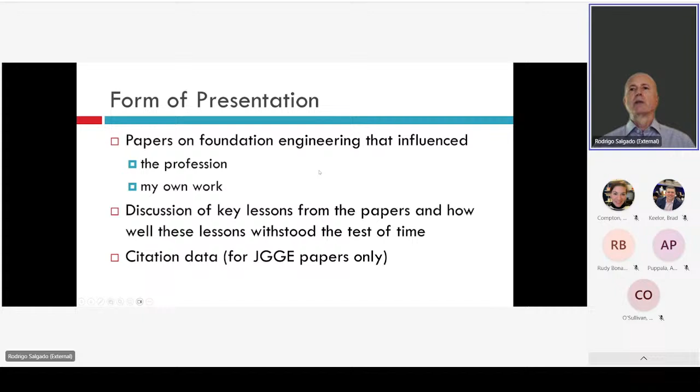I'll talk a little bit about citation data, at least I'll have the numbers on the slides for the JGGE papers only. In selecting the papers to include here, I considered a narrow definition of foundation engineering. Basically, the focus is on papers that explicitly dealt with foundation elements, piles, footings, etc., in which some significant vertical load was present. So no papers on slopes, retaining structures, seismicity, and so on are included.

So we'll start with shallow foundations, with this paper—actually a discussion by Meyerhof of a paper by Jumikis, published in 1956. This was a discussion based on experimental work that Meyerhof had been doing, and it's apparently the first time that we get into bearing capacity equation factors for load eccentricity and inclination. The other interesting piece of this discussion was Meyerhof's observation that in his experiments, the shape of the slip surfaces looked like a log spiral.

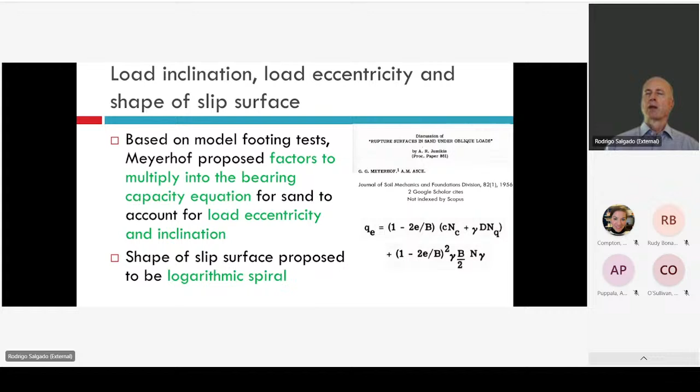So how has that withstood the test of time, as we said we would talk about? What have we learned about those two things since? We know, for example, that there is fundamental error in the bearing capacity equation for sand. An important part of that is that sand does not follow an associated flow rule, which was a key assumption in the derivation of the bearing capacity equation originally. This leads to an over-prediction of the bearing capacity of footings in sand if you use the original unmodified version of the equation. Eccentricity is still accounted for in the same manner if you're working with the bearing capacity equation, but there are alternative approaches like VHM diagrams.

Imaging plus digital image correlation analysis of these images do show that the surfaces resemble a log spiral, but they are not really a log spiral, because you don't have a constant friction angle along the entire shear band or line.

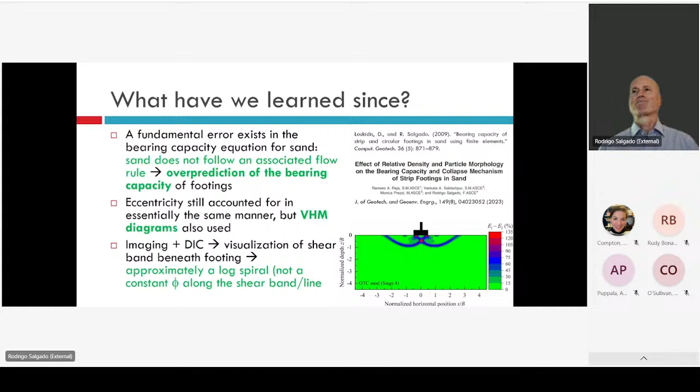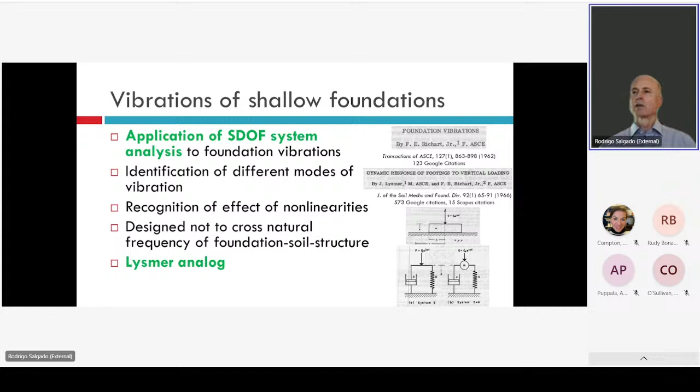Two important contributions that appeared in the journal were from Richart and Lysmer, dealing with foundation vibrations. The idea here was basically the application of analysis for single degree of freedom systems to foundation vibrations. In the papers there was discussion of different modes of vibration—three rotations and three translation modes—and recognition of the effect of nonlinearities on the response of the foundations. There was also discussion of design, such as a possible strategy of not crossing the natural frequency of the systems during design. An important result of this work was the proposal of what is today known as the Lysmer analog, which essentially converts energy loss due to wave propagation to a representation using a dashpot and viscosity.

Moving on to deep foundations, starting with axial resistance. This paper by Meyerhof in 1956 followed a trend at that time of trying to approach the calculation of the base capacity of piles using something resembling the bearing capacity equation. This particular proposal by Meyerhof, of course, was not correct—you can see that the mechanism proposed for failure of the pile was kinematically inadmissible. Today we're largely beyond using this type of approach for pile axial resistance calculation.

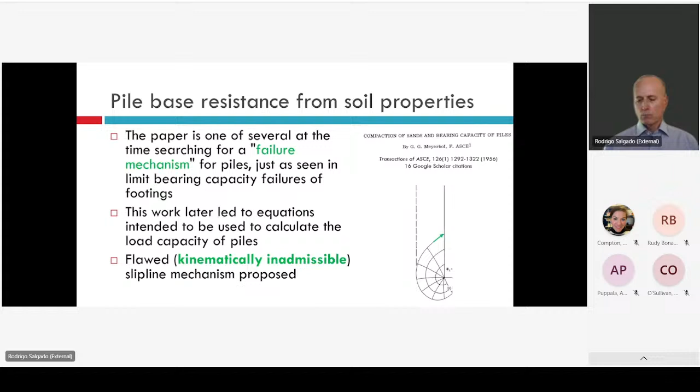We have also learned that it's much more effective to try to do pile base resistance calculations using something like the CPT. So you're basically analogizing the limit bearing capacity of a pile to the cone resistance, and then expressing pile unit base resistance at different levels of settlement as some fraction of qc.

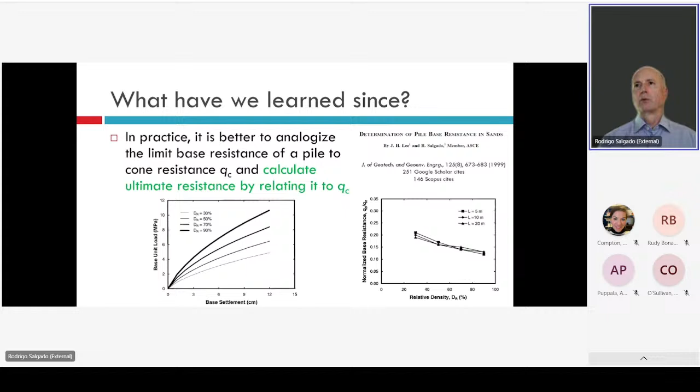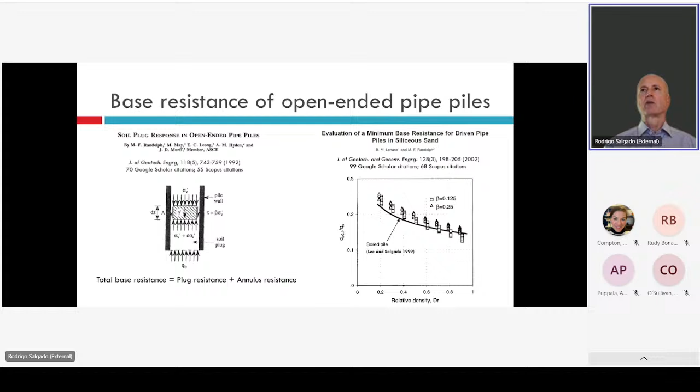The journal also published important papers dealing with open-ended piles. This paper by Randolph et al., published in 1992, attempted perhaps the first analysis of the mechanics of plug formation in an open-ended pile. That work continued at the University of Western Australia, and Lehane and Randolph published another paper in which they concluded that the unit base resistance of open-ended piles, and in particular the soil plug, could be analogized to that of a bored or non-displacement pile, or at least calculated using the unit base resistance of bored piles as a reference.

So what have we learned since? We have learned that plug formation is a function of a number of variables. Relative density is an important one. The presence of layering, whether the pile is going from loose or soft soil into dense or stiff soil, or the opposite, makes a significant difference in whether you form a plug or not. Also important are the effective stress state, the diameter of the pile — it's of course easier to plug with a smaller diameter — and wall thickness.

Something else that has been learned is that even if you have a fully coring installation, that plug is still active. So it becomes a matter of calculating what the contribution of the plug is to base resistance.

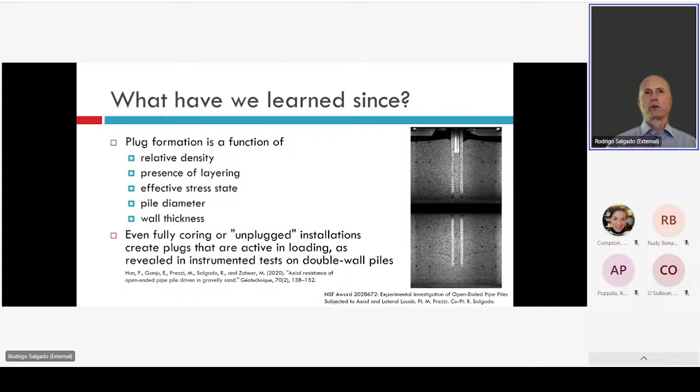Another important paper published in the journal had to do with the difference in shaft capacity of the pile between tension and compression. This is a paper by De Nicola and Randolph, published in 1993. The paper brought attention to the difference that can exist between tensile and compressive shaft capacity. The authors at the time hypothesized that this would be due to Poisson's effect. I think today we know that not to be the case.

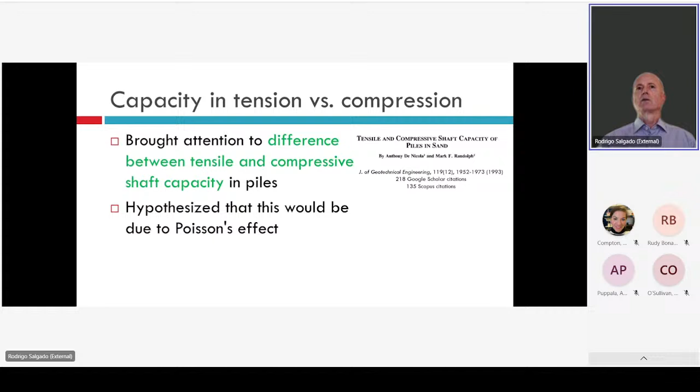Lehane, Jardine, Bond, and Frank published in the journal this very important contribution. They used a model pile that allowed them to track the shaft resistance as the pile was driven down into the ground. What was seen is that the shaft resistance tended to degrade the most for locations up the pile, further away from the pile tip.

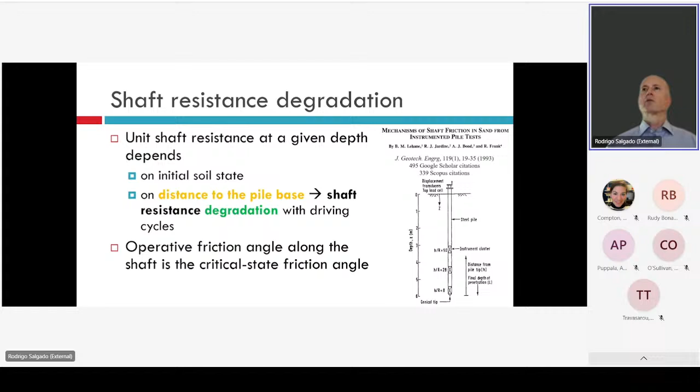Another very impactful contribution was published in the journal in 1988. This paper by Harry Poulos proposed the use of cyclic stability diagrams for axially loaded pile design. This is still used a lot in the offshore industry. The idea is that depending on the number of load cycles and the amplitude of the load cycles, you may see a significant degradation of axial capacity and possibly even a loss of stability, or you may not see that at all. It all depends on the combination between load amplitude and number of vibrations. So these diagrams are still part of design to this day.

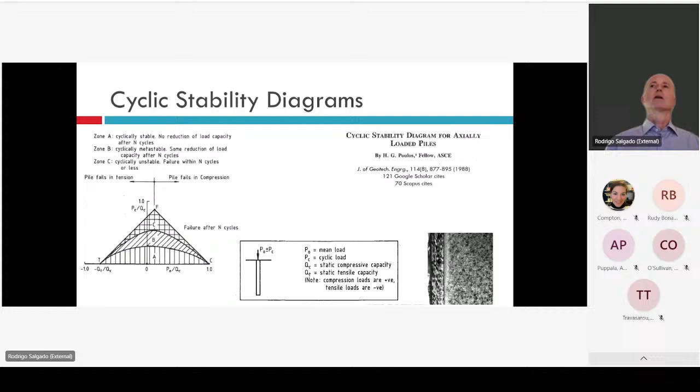Moving on to pile driving.

Perhaps the most impactful paper in this area is the paper by E.A.L. Smith, proposing what we know today as the wave equation analysis to simulate the driving of piles in the ground. You start with known or assumed static resistance along the shaft of the pile and at the base, and using information about energy loss along the pile shaft, so damping, you simulate the driving of the pile. Basically, you try to simulate how much a pile will advance for a given hammer blow if you know the static resistance of the pile and the damping characteristics of the soil.

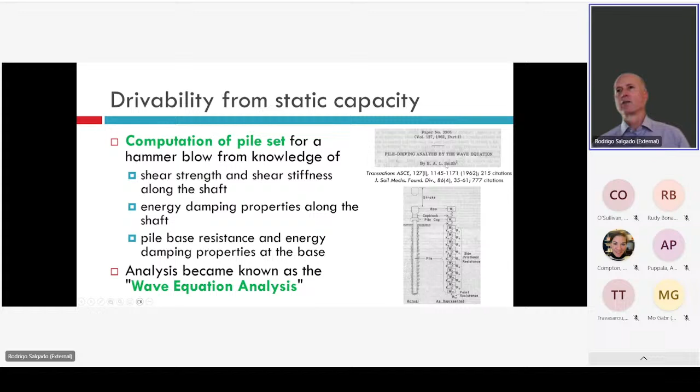An interesting fact about this paper is that if you look at the initials of the author, E.A.L., they are key variables in this analysis. E is Young's modulus, A is the pile cross-sectional area, L is the pile length, and you could argue that the S in Smith stands for settlement, perhaps.

Kind of the reverse logic of that paper, instead of going from static resistance to driving resistance, you try to go from driving resistance to static resistance. That's what this contribution by Rausche, Goble, and Likins is all about. It became the basis for methods of quality assurance and quality control that we use in geotechnical engineering today to a large extent, which are dynamic load tests. The idea is that you measure force and velocity during a hammer blow, and you try to figure out what that tells you about the static resistance of the pile.

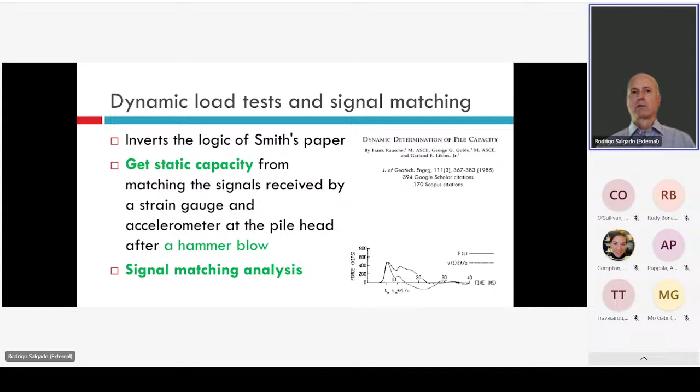The methods that allow you to do this are known as signal matching methods. What we have learned since is that the relatively simple models used originally by Rausche et al. can lead to under-prediction of pile capacity. So if you use more realistic models for the soil and for the pile-soil interaction, you can get more accurate estimations of pile capacity. But the method in its core, as originally proposed, stands to this day.

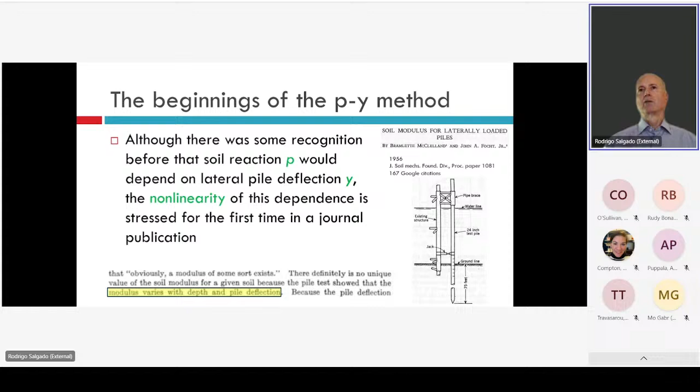Moving on to lateral loading, it appears that the first time that something we would now recognize as the PY method was proposed was in the paper by McClelland and Focht in 1956. The key recognition by the authors was that the normal stress between the pile and the soil would depend on the lateral deflection Y in a nonlinear manner. This, of course, would lead to so-called PY curves, in which you don't have a linear relationship between P and Y, but a nonlinear one.

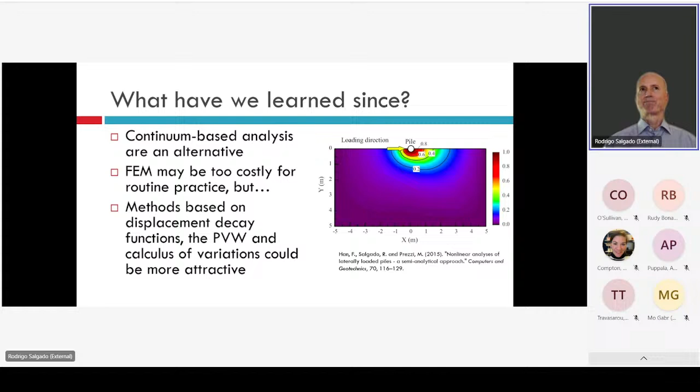What we have learned since is that there is an alternative route, not often used in practice, but which probably leads to more accurate results, which is to do analysis based on the soil modeled as a continuum. You can, of course, use FEM, but there are alternatives to FEM that produce faster results and are just as accurate.

I believe the final paper I have included in this presentation is by Stewart and co-authors, recently published in the journal. It deals with the case history of the settlement and tilt of the Millennium Tower in San Francisco. The authors go into great detail on aspects of what happened, including drainage issues. However, I think an important lesson from this case history that I hope the journal revisits with more publications is the risk of placing deep foundations on intermediate layers. If you do that, you need robust analysis to go with it to make sure that layer will be able to carry the load you're placing on it.

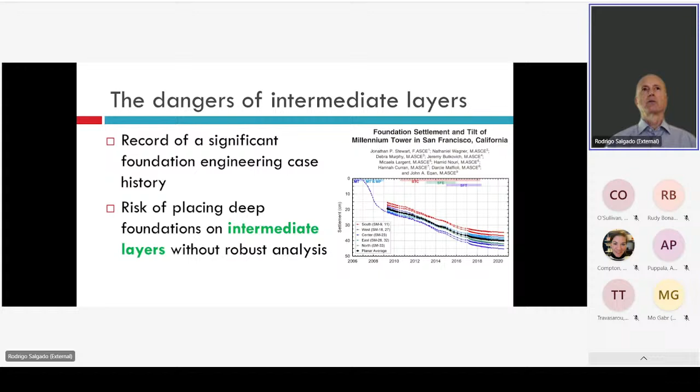This is not a new problem. If you go around the world, you will find similar cases. For example, in the city of Santos in Brazil, you also have buildings placed on deep foundations in intermediate layers that have settled and tilted. So it's definitely one of those areas that the journal tends to publish a lot, case histories that offer the community an opportunity to reflect on these challenges.

I think I have shared with you a number of papers that illustrate the importance of the JGGE in advancing the knowledge of foundation engineering over the years. There have been seminal contributions to the journal in terms of shallow foundation bearing capacity, foundation vibrations, the axial capacity of piles, non-displacement, displacement, and open-ended pipe piles.

The key papers that laid out the dynamic load test method of foundation verification and wave equation analysis for foundation design and planning were published in the journal. The PY method, which is widely used in practice, the original paper was also published in the journal.

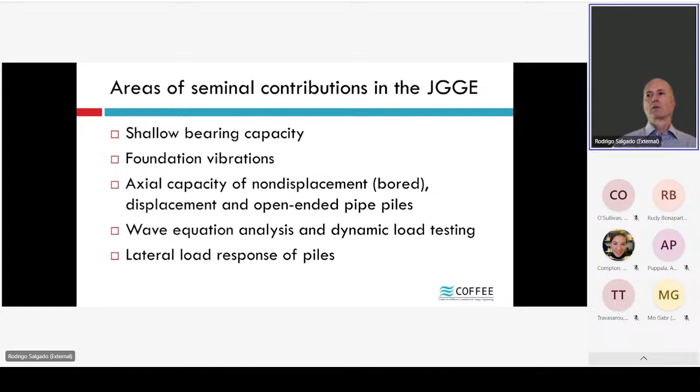I think these papers illustrate the importance of the journal to the community. Thank you very much again for the initiative of organizing this, and I'll pass this on to Rudy now.

Thank you, Rod. I'll just get myself organized here. My topic today is geoenvironmental engineering contributions to the ASCE JGGE.

To prepare for today, I conducted a survey of the journal to identify geoenvironmental papers. I estimate that as of this time, there have been about 240 such papers in the journal.

The first paper was authored in 1965 by Jim Mitchell and his students on the topic of the permeability of compacted clays. In the 1970s, I identified two papers related to geoenvironmental engineering, one on MSW landfill rates and another on methane migration around MSW landfills.

Moving on to the 1980s, there were about 10 papers on a broader range of topics. Then in the 1990s, about 25 papers on an even broader range of topics. You can see the trend here. In the 2000s, 60 papers; 2010s, 90 papers. And we're tracking for the 2020s at about 100 papers on a continually increasing range of topics.

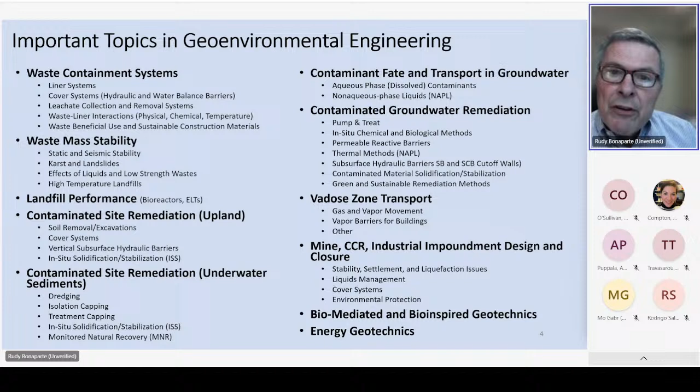When we think about geoenvironmental engineering, it includes all of the topics shown here. It's a broad field encompassing a lot of things. For today, we're just going to touch on the first three on the left-hand side of this slide: waste containment systems, waste mass stability, and landfill performance. These are the three that have received the most attention in the journal over the years.

So let's start with a few notable papers on compacted clay liners. As I already mentioned, the first journal paper from 1965 was authored by Jim Mitchell and several of his students, titled Permeability of Compacted Clay. The paper identified for the first time the importance of compacting wet of the line of optimums using kneading and not static compaction to achieve low permeability. This is shown in the figures from the paper on this slide.

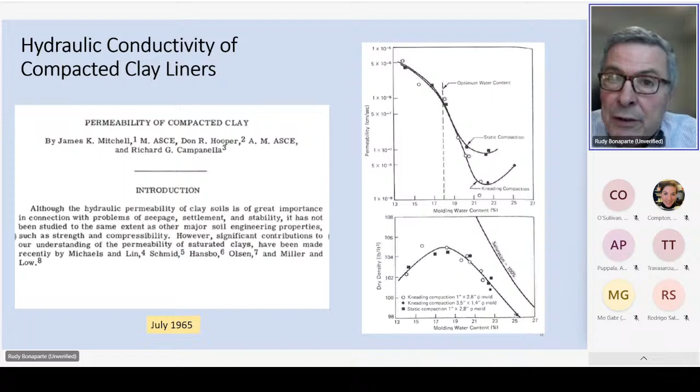This paper was the starting point for much future work by others that appeared in the journal. For example, nearly two decades later, Dave Daniel launched a major research program studying the factors controlling the hydraulic conductivity of clay liners. His 1984 paper, Predicting Hydraulic Conductivity of Clay Liners, showed the important role that compaction moisture content has on clay liner permeability, as shown on the figure from the paper on the left-hand side of the slide.

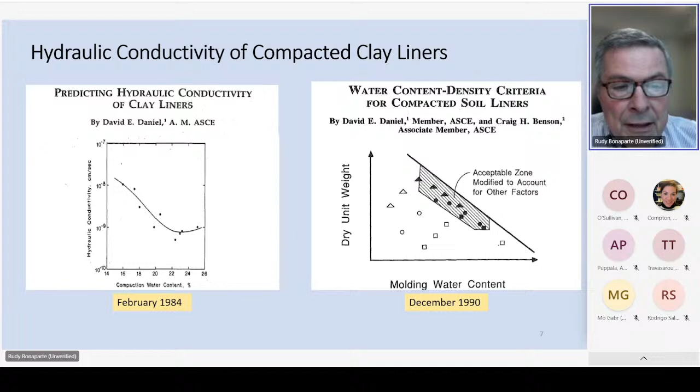A little later, in 1990, Dave and his student Craig Benson authored an important paper clearly defining the compaction water content and dry density conditions needed to achieve low hydraulic conductivity. These conditions are illustrated in the figure from the paper on the right-hand side.

Two more important papers on compacted clay liners are shown here. In another 1990 paper, Benson and Daniel described the problem of trying to achieve low hydraulic conductivity when the clay material contains large clods. And if you work in this area, you know that's a fairly common occurrence. They showed that to achieve low hydraulic conductivity, the combination of compaction, water content, and compaction energy had to be sufficient to destroy the clods and eliminate large interclod voids.

This is clearly illustrated in the photo on the left, where you see for compaction at 12% moisture content and standard Proctor energy, the clods were not destroyed, whereas at 16% moisture and modified Proctor compaction, you have a homogeneous clay liner material.

In 1999, Benson, Daniel, and Boutwell synthesized data for 85 full-scale clay liners for which field permeability testing existed, such as from sealed double-ring infiltrometers. They provided comprehensive recommendations for constructing high-quality clay liners in the field. Their recommendations, shown in the figure on the right, are still in use today.

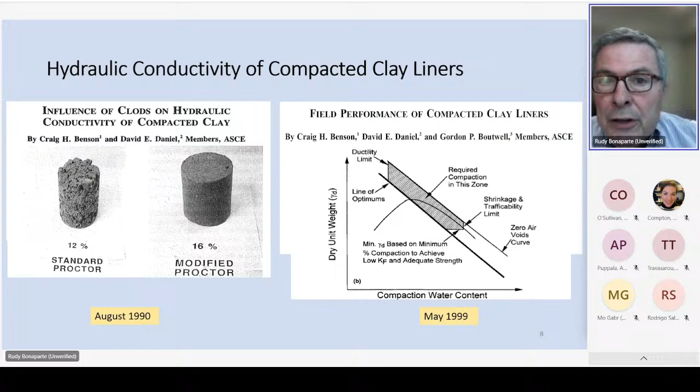Let's move on now to highlight just a few noteworthy papers on the topic of geosynthetic and soil-geosynthetic interface strength. For those of you that work in these areas, you know this is very important with respect to the stability of any geosynthetic lined facility.

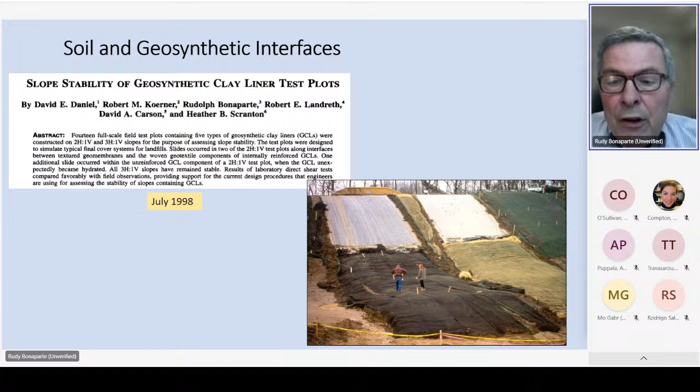In the latter 1990s, Dave Daniel, Bob Koerner, and I, as principal investigators for EPA, designed, constructed, instrumented, and monitored 14 geosynthetic clay liner, or GCL, final cover systems. Several of the plots were designed to fail and did, as shown in the photograph. Others remained stable with varying magnitudes of shear displacements. The test plots yielded a great deal of useful information that was interpreted to better understand the interface and internal shear strength of GCLs and their proper use in landfill cover systems.

I'll move on now to highlight just a few noteworthy papers on the topic of landfill slope stability.

Important lessons learned from this case study include the risks of allowing leachate levels to build up in old unlined landfills, the risks of overfilling old unlined landfills beyond their permitted grades, and the risk of progressive softening and strength loss of native foundation soils.

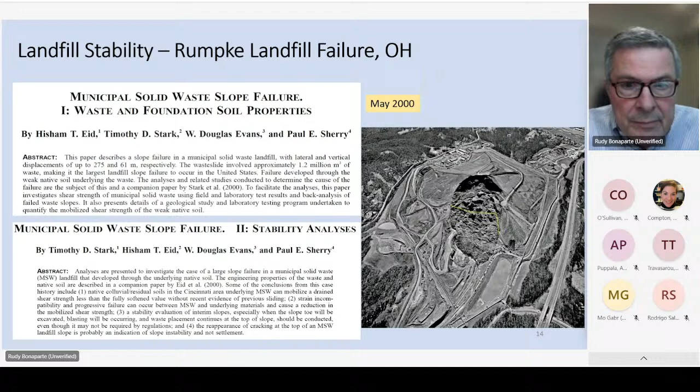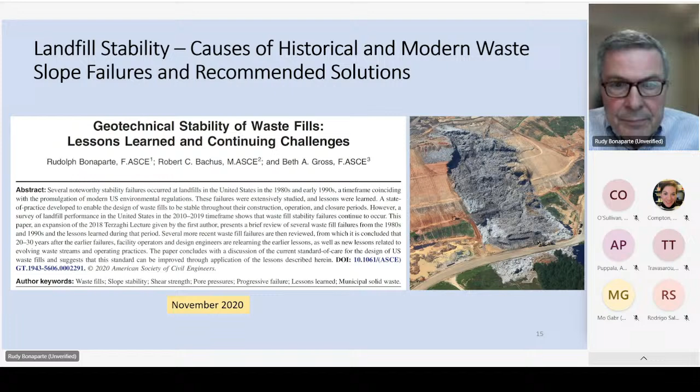Any time you conduct a stability analysis of a waste mass, you need to select shear strength parameters for the waste. We don't routinely conduct waste strength testing for projects—it's too complex and expensive. You need very large samples, it's very hard to make them homogeneous and consistent, and you have environmental issues because it's a waste material.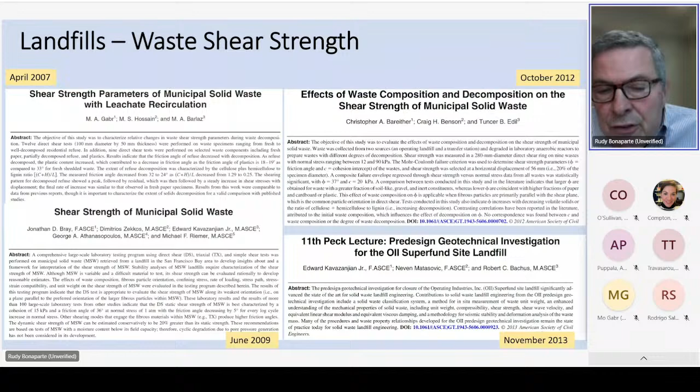Instead, we mostly rely on the results of published studies, such as the four shown here, that appeared in the journal between 2007 and 2013 by Mo Gabr, Jonathan Bray, Chris Bareither, and Ed Kavazanjian, and all their colleagues listed on the papers.

Another topic that has been covered in the journal is the performance of geomembrane liners. One of the most important parameters for geomembranes is service life—that is, how long will the geomembrane last?

One final important paper related to geomembrane performance is Kerry Rowe's 2017 Terzaghi lecture, Protecting the Environment with Geosynthetics. The paper summarizes and organizes an enormous amount of work conducted by Kerry, his colleagues, and others. It touches on topics such as the causes, sizes, and frequency of holes in installed geomembranes, leakage rates through geomembranes and composite liners, performance of leachate collection systems, and antioxidant depletion and service life of geomembranes. It's an excellent paper and I highly recommend it.

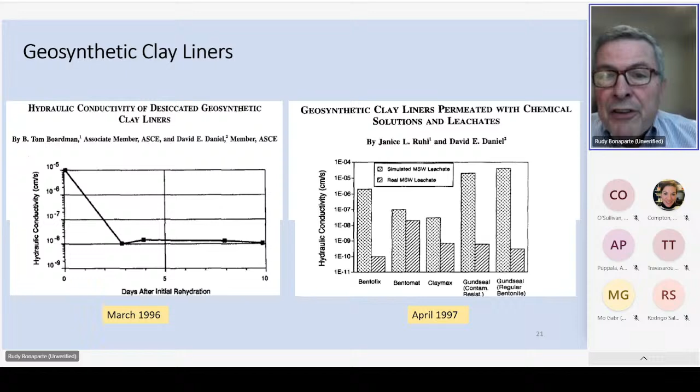Not long after Daniel's work, Craig Benson and his students and colleagues began their work on GCLs. The work spanned more than two decades, and it continues today. I'll highlight just two papers from this group.

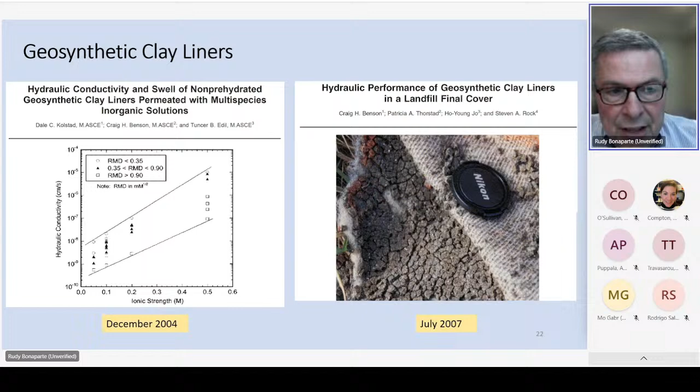The second paper, from 2007, looked at the performance of GCLs in a full-scale final cover system, finding increases in GCL hydraulic conductivity over time due to both cation exchange reactions and dehydration. You can see the effects primarily of dehydration in the photograph.

I'll wrap up by simply making the point that many have contributed geo-environmental content to the journal, and that the journal has been a leader in this regard. If I had more time, there are many more contributions I would like to recognize from the people shown here and from many others. The journal has played an extremely important role in establishing and advancing the geo-environmental field. I congratulate ASCE on 150 years of success with the journal, and I look forward to seeing the contributions that will be made in the coming years.

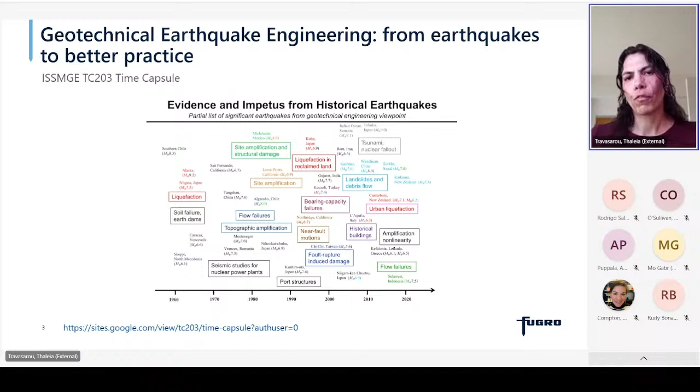Looking now at the evolution of the field from the 60s to present, we can broadly subdivide into three periods. The 60s and 70s was the period of raising awareness. The 80s and 90s, the period of developing early models and methodologies to assess earthquake effects. And for the past two decades, the focus has been, on one hand, on refining the early models and methodologies, and on the other, on developing advanced models and exploring special cases.

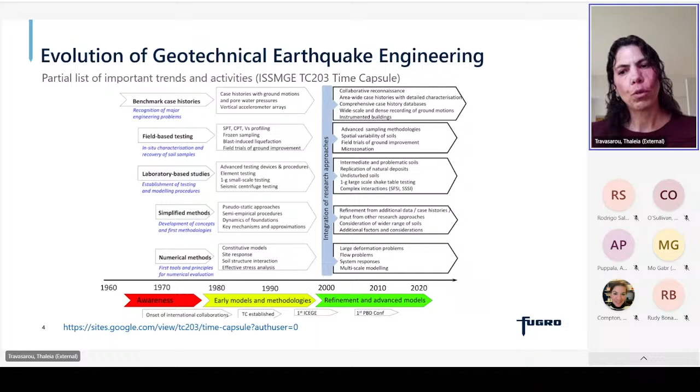I will be using a similar timeline to look at key papers published in ASCE for this presentation. I chose to focus on 4 main topics that represent the majority of research and practice: liquefaction, dynamic site response and local site effects, seismic analysis and design of earth and retaining structures, and seismic foundation design and soil structure interaction.

We will note that in early publications, these topics were addressed almost independently of each other, whereas as the field evolves, interconnections between these topics are also addressed in research. There are also areas I'm referring to as enablers, such as the characterization of dynamic soil behavior, availability of case studies and physical model tests, advancements in numerical modeling and probabilistic methods. Progress in these areas triggers significant advancements in the 4 main topics.

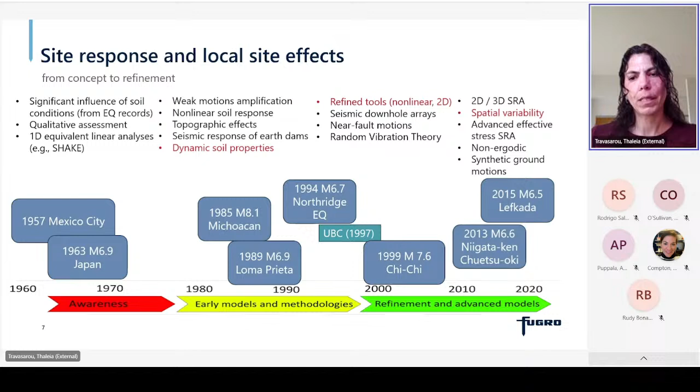In the past 15 years, research and practice moved mostly towards analysis in multiple dimensions, incorporating the effects of spatial variability in soil properties, also soil liquefaction through effective stress approaches. Finally, newer topics include non-ergodic and synthetic ground motions.

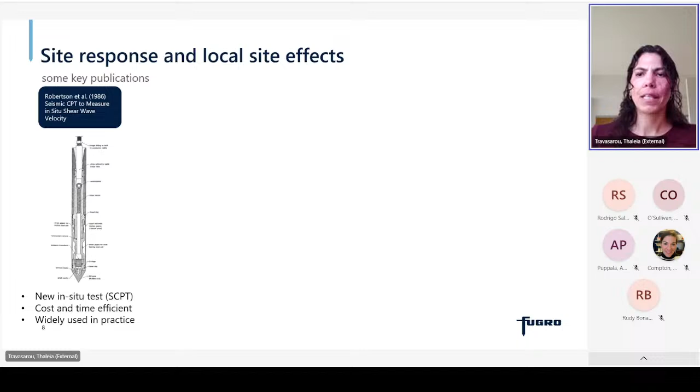In terms of some key papers, in 1986 Robertson and co-workers introduced a new test, the seismic CPT, to measure shear velocity in situ. This was, and is, a cost and time efficient test that has been used by practicing engineers ever since.

Next, we have a set of 2 papers on the G over G max and damping curves. The paper by Seed and co-workers focuses on cohesionless soils, and it includes an excellent discussion on the factors influencing G over G max and damping. Similarly, Vucetic and Dobry highlighted the important effect of plasticity for cohesive soils, and they proposed a set of curves. All the curves presented in these papers are still used to this date, with some refinements, of course, by later research.

In 2016, Groholski and co-authors presented a simplified constitutive model for site response analysis, which meets the requirement of limiting shear stress at large shear strains. This model has been incorporated in software widely used in practice.

Finally, more recently, Hallal and co-authors compared the state-of-the-art approaches to account for spatial variability in one-dimensional site response analysis, which is not commonly done in practice. They used geophysical H/V measurements to inform the degree of spatial variability and provided insights and practical guidance.

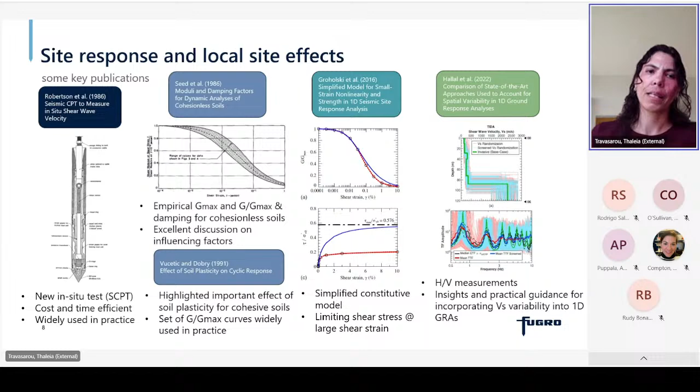The second topic is seismic analysis and design of earth and retaining structures. In the early days, research was motivated by the need to design dams for seismic actions, and this is when tools like the pseudostatic analysis or the concept of the seismic coefficient were first introduced. Also, the rigid block model, presented in a seminal paper by Newmark, was proposed as a simple tool to approximate seismic slope displacement.

Then there was a clear evolution from force-based methods towards displacement-based methods, and this is when the first simplified procedures were proposed to quantify seismic slope displacements. Also, the importance of slope flexibility was highlighted by researchers.

But in general, these simplified procedures were mostly decoupled in the treatment of wave propagation and slope sliding. Then in the 1990s, there were improvements in the state of practice that were triggered primarily by the new federal regulations for the seismic design of solid waste landfills.

This is when refined slope models were presented that coupled wave propagation and sliding. Subsequently, improved simplified procedures were developed based on these refined models, and probabilistic approaches were proposed. More recently, research has focused on further refinements of simplified procedures based on larger data sets and different environments, but also on the development of soil constitutive models, allowing us to perform more detailed coupled nonlinear deformation analysis.

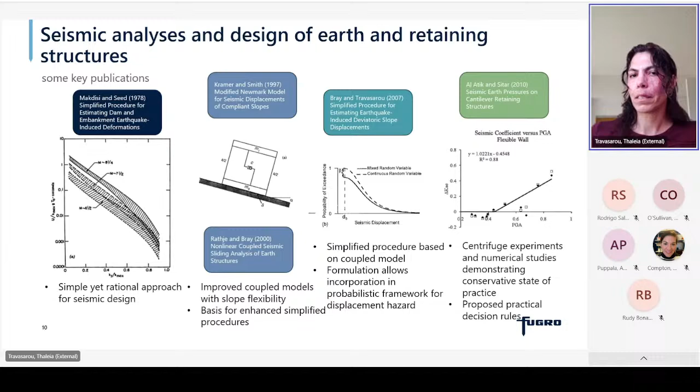The third topic is huge: that of soil liquefaction. After the devastating earthquakes in Alaska and Niigata, Japan, geotechnical engineers took serious interest in this phenomenon. In the next decade, the first simplified procedures to evaluate liquefaction potential were presented, and those were later refined based on larger data sets, alternative formulations and parameters, and intensity measures.

But more importantly, the profession started exploring the effects of soil liquefaction rather than just focusing on liquefaction triggering. The concept of residual strength was proposed to characterize properties of liquefied ground in quantitative evaluations of liquefaction effects. In the early 2000s, a number of probabilistic methods were also presented, and liquefaction of intermediate soils was studied in the aftermath of the Kocaeli earthquake in Turkey.

In the last 10 years, the profession shifted towards performance-based design, and this has been enabled by significant advancements in soil constitutive modeling, numerical modeling platforms and tools, and complex experimental work.

We also see that the effects of spatial variability in liquefaction-induced demands are studied in more detail, and at the same time, liquefaction and its effects are studied for a wider range of soils. Finally, researchers are also evaluating more innovative approaches to mitigate liquefaction hazards.

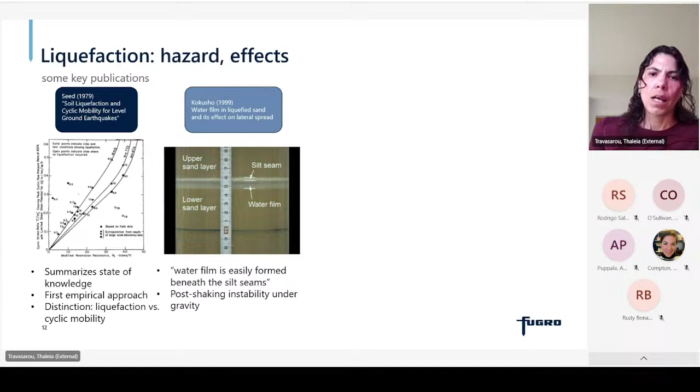Then, as part of research focusing on liquefaction of silty soils, Bray and Sancio ran a large number of laboratory tests, and they recommended that the Chinese criteria should be discontinued for the assessment of liquefaction susceptibility of intermediate soils. At that same time, Boulanger and Idriss recommended to differentiate between sand-like and clay-like behavior.

And I do find this concept very insightful. It has certainly helped me engage with non-technical audiences, such as our clients mostly are.

Last but not least, following observations during earthquakes in New Zealand, Maurer and his co-authors found that LPI can overpredict liquefaction potential for interbedded soils and soils with high fines content, and they proposed changes in the calculation to achieve better predictions.

So the last topic is that of seismic foundation design and soil-structure interaction. In the early days, research focused on shallow or embedded foundations. This was motivated by problems related to machine vibrations and seismic design of nuclear power plants.

This is when simplified analogs were developed for computing foundation impedances, mostly treating soil as a homogeneous half space, and when early finite element computer programs were developed, based again on simple constitutive models, mostly equivalent linear. Then in the 1980s and 90s, there were new challenges related to seismic design of deep foundations and foundations in layered soils.

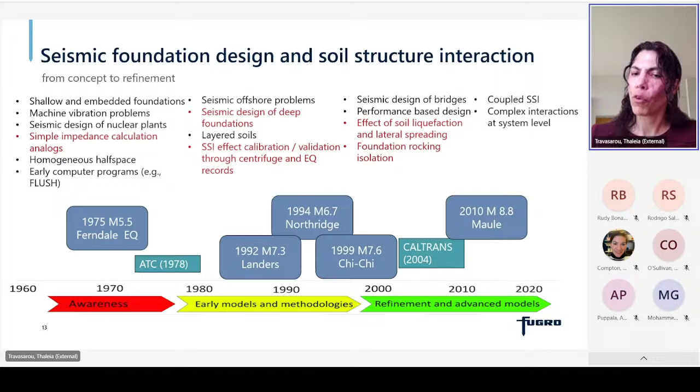At the same time, there was a larger number of earthquake recordings and an increase in experimental work, and this allowed better calibration and validation of simple design tools to incorporate soil structure interaction effects. In the last 20 years, researchers started working on increasingly complex problems, also involving soil liquefaction. And as I pointed out earlier, the profession transitioned towards seismic design based on performance, developing and presenting tools to do that more reliably.

In terms of some key publications, in 1975, Seed and co-authors reviewed the strengths and limitations of the state-of-the-art at the time to evaluate soil structure interaction. They stated that seismic soil structure interaction is an extremely complex problem, and it is necessary to adopt methods that have the capability to incorporate many, and hopefully the most important, aspects of the actual conditions. I think this statement, around employing engineering judgment even in the selection of our tools, remains true even today, despite significant advancements in this field.

Then the paper by Gazetas presented a comprehensive set of dynamic foundation impedances, which could be used by practicing engineers, and due to its simplicity is a practical tool allowing parametric analysis to develop insights.

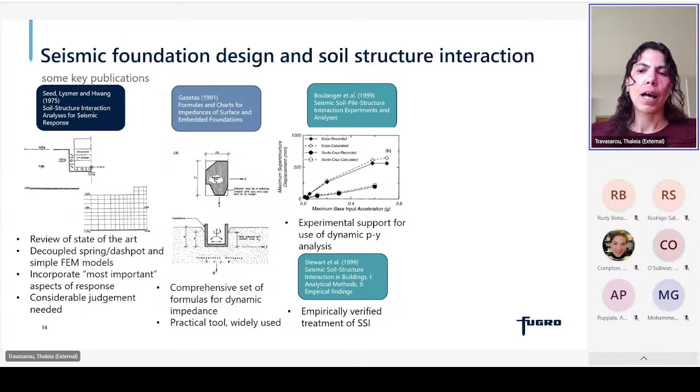Boulanger and his co-authors present a series of centrifuge experiments to demonstrate the validity of the dynamic P-Y analysis for pile-supported structures in soft ground. And in the same year, Stewart and his co-authors presented methods for the treatment of kinematic and inertial soil structure interaction effects in buildings, based on a large database of recordings from earthquakes, mostly in California.

And finally, Gajan and Kutter presented a series of centrifuge experiments which provided support to the novel concept of allowing the soil to yield in place to improve the performance of the structure during seismic loading.

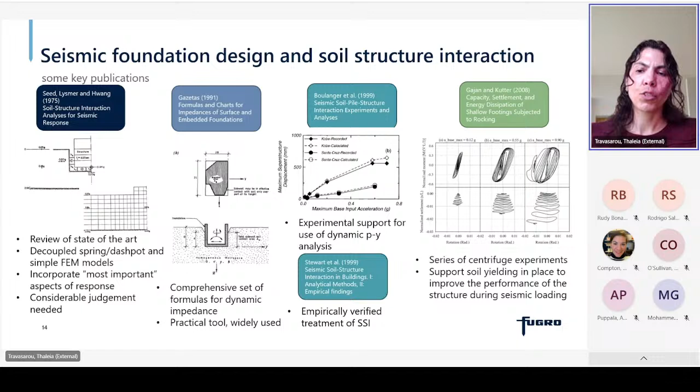I have added this extra slide for soil structure interaction in the presence of liquefaction due to the significance of the topic. First, with a series of experiments, Brandenburg and co-authors characterized the soil-pile interaction in liquefiable ground with lateral spreading, and they provided much needed insights on loading patterns.

Then Dashti and her co-authors ran a series of centrifuge experiments which improved our understanding of the dominant settlement mechanisms for buildings with shallow foundations on liquefiable soils. One very useful conclusion from that paper is that, contrary to the state of practice at the time, liquefaction-induced building settlement is not proportional to the thickness of the liquefiable layer.

And finally, Sinha and his co-authors proposed a novel displacement-based method to assess liquefaction-induced downdrag, which is typically treated with force-based methods still in practice, unfortunately.

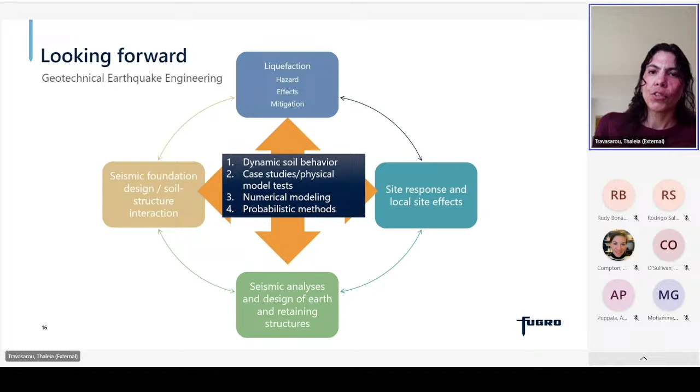So with that, what should we anticipate looking forward? There are additional enablers to boost further advancements in the field of geotechnical earthquake engineering: tremendous increase in computational power, artificial intelligence, new challenging design problems, new materials, and the journal is already promoting publications in these areas. I'm sure that, as in the past, it will continue to play an instrumental role in shaping the field of geotechnical earthquake engineering.

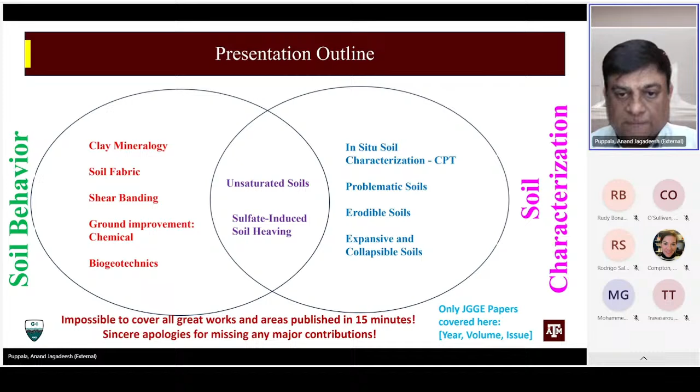Starting with clay mineralogy, whenever we talk about soil behavior, Jim Mitchell's book comes to mind right away. Clay mineralogy basically covers different types of clays, their structure, and when you compact them in a soil mass, it may constitute a fabric. These are very important underlying factors that affect soil properties.

On the right side, you see properties like soil thixotropy, which is a time-dependent strength gain, given by Mitchell's paper. There's also a study by Mitchell with different types of samples prepared as molded and aged versus remolded and recompacted, which clearly showed differences in strengths based on the type of sample preparation, which in turn accounts for the soil fabric.

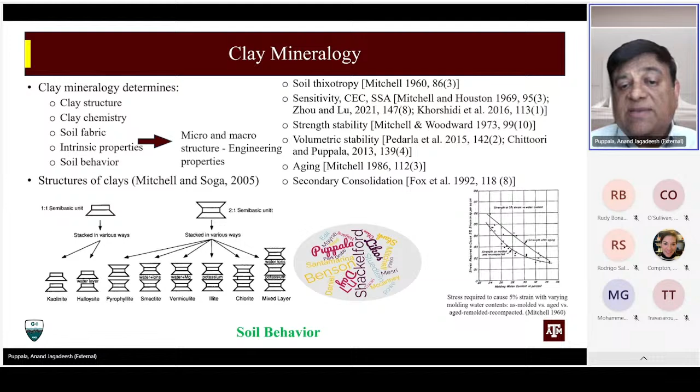There are also papers on sensitivity, linked with cation exchange capacity and soil specific surface area. There are a lot of papers listed there, including as recently as the Khorshidi paper. There's also strength stability, with a classic Mitchell paper on that topic. And volumetric stability, which is linked to clay mineralogy and expansive soils, related to volume swell and shrink-swell changes - that's something we've been working on. There's also aging, cementation, and secondary consolidation, with many classic papers out there - this is part of the underlying clay factors and how they impact soil behavior.

This slide covers shear banding. Khalid Alshibli and Stan Sture's work in 2000 talked about developing shear banding in a fine Ottawa sand sample under triaxial conditions. You can see the grid that is placed, and as the shearing is done, the shear band formation is clearly mentioned. They also showed the effect of various sandy soil properties like dry density, compaction density, or relative density, linking it with particle diameter, looking at both loose and dense samples to see what the banding looks like. This is one of the interesting studies.

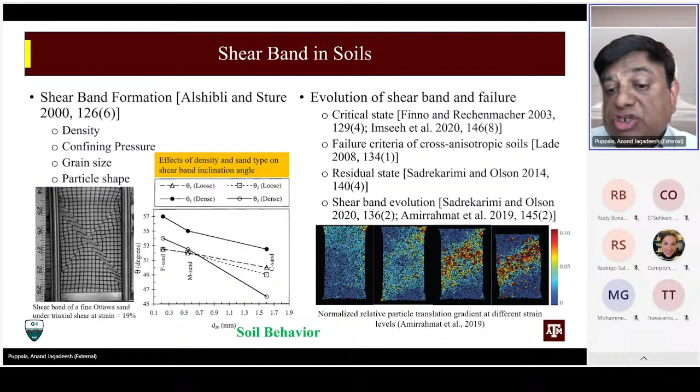On the right-hand side you'll see shear banding and how it's impacting various soil properties, including critical state conditions given by Finno's work, and anisotropic soils given by Dr. Lade's work. A lot of other folks are also looking at residual state parameters, like Olson and his group. Karami actually looked at a discrete element model - if you see that figure on the right, it clearly showed how particle orientation impacts shear band formation.

Now we are going into chemical stabilization. This is still part of soil behavior, because it's very important for understanding the reactions between soil and different additives that we add. Some cementitious or pozzolanic stabilizers have a lot of papers on them - one of Jim Mitchell's papers in 1984, the Terzaghi lecture paper, talks about different stabilizations and issues like sulfate resistance, important contributions by the journal. There are also interesting works on dredged material - Grubb has several papers on stabilizing dredged clays.

And this is quite important these days in the coastal sediments and clayey sands. You see Nilo Consoli's work, and in organic soils there are several papers, including Tastan's paper. And again, these are mostly seen on the cementitious material.

And of late, we see a lot of biopolymers, like lignosulfonate is one of them. Indraratna has done some work on this. There are several folks working on these different types of biopolymer additives. And then synthetic organic polymers are also of late having significant interest in the practice because of the relative quickness in mixing them.

So one thing, when we looked at some of the papers published on stabilizers, we looked at the different topics. Obviously the cementitious materials, cement, lime and fly ash, initially came out on top. But one thing that is coming up much faster is MICP. You see on that right side, this figure is actually an indicator of how many papers have been published in the JGGE.

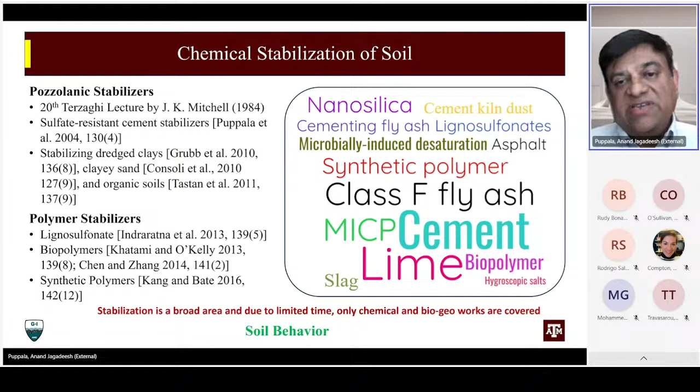So MICP, if you ask the editorial board, they'll tell you there are a lot of papers nowadays we receive on MICP work. So for that, I need to start with a little bit of intro on the Mitchell and Santamarina paper from 2005. They talked about this biological or microbiological phenomena. On the right-hand side we see the figure showing different sizes going from nano to micro to milli size of the materials. And on the same slide they talked about different viruses and also some bacteria, and you can see the bacteria goes from nano to micro.

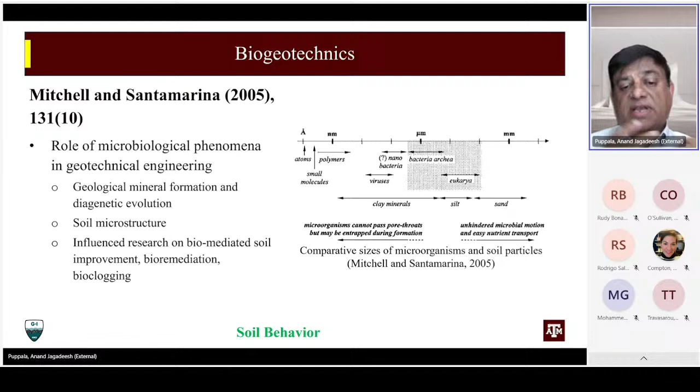So one of the things mentioned here is this bacteria is most effective when you're dealing with slightly coarser silt to sandy soils and other areas. Again, there's a lot of research going on in finer materials also, but this is one thing that has had tremendous interest in recent years.

And you all know this paper again, DeJong's paper, it's from 2006, probably one of the highly cited papers. And it showed, for the first time, that MICP, microbiologically induced calcite precipitation, can strengthen sandy soils. They used the ureolysis of Bacillus pasteurii, and they showed not only increase in shear strength but also increase in stiffness.

There are several folks working on this area that go from the particulate level, like particle scale size level, to as high as field scale demos. At the particle size, I mentioned some of the works there. In the middle you see some of the triaxial specimen size work. Montoya's work is mentioned over there.

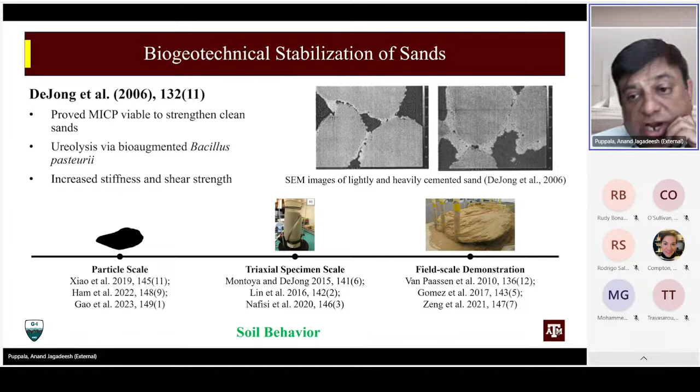And now you started seeing them going into practice also, so you see a lot more field scale demos happening right now. I see some of the works from Arizona State University, they are doing some interesting work, and Van Paassen is doing some of the field demo works. I'll talk about them a little bit later.

There are a few other topics in bio-geotechnical stabilization. They are known as EICP, which is more of an enzyme-induced carbonate precipitation. This is mostly coming from enzymes from jack bean or soybean or other types of materials, and they mix with it and then try to stabilize the soil. I see a lot of interesting work going on, and also some interesting applications, both in increasing pile foundation capacity as well as increasing erosion resistance of coarse sandy soils. These papers were published in the JGGE since about 2013.

And then on the right-hand side you see more of MIDP, microbially induced desaturation. The desaturation happens due to denitrification, mostly nitrates converting into gas bubbles, so they create an unsaturated environment that causes the material to have more resistance to liquefaction. I see some interesting work, including work by Diane Moug in the Portland area on desaturation in real field conditions. I see some of these topics probably reaching higher technology readiness levels, where you'll see more and more field studies demonstrating how they can improve performance.

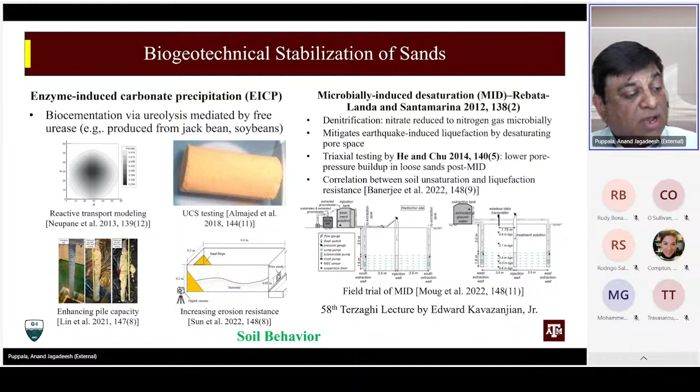Also see some of the unsaturated soil work related to Banerjee, and how it's helping with liquefaction resistance. More details on this topic can be seen in the recent Terzaghi talk by Ed Kavazanjian in the 58th Terzaghi lectures, available probably on YouTube also. Then I also want to mention in situ soil characterization in the coming few slides.

One area that's really hot for the US, in the late 90s or early 2000s, is development of various cones, starting with CPTU piezo cones. Some of the practice from Europe developed in the US also from several groups. Remember folks like Tumay, Schmertmann, and several others working on the West Coast and East Coast, and also Paul Mayne and David Frost.

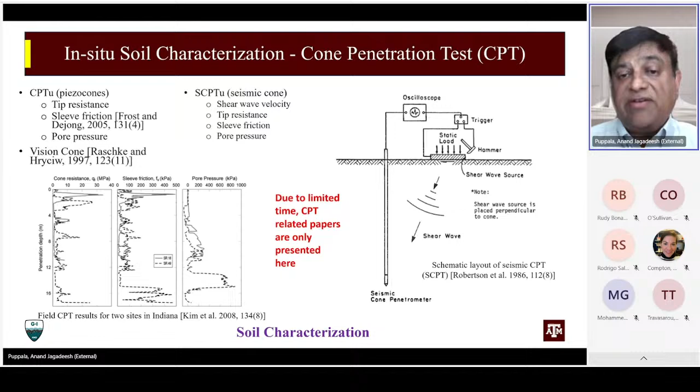One area that's really hot is Roman Hryciw's work with the vision cone, which developed quite a bit. They used a cone with an optic eye, and as you push into the ground, they're able to take pictures and do a lot of interesting work. I think it's also worth mentioning Robertson's 1986 paper on the seismic cone, measuring an extra parameter of shear wave velocity along with the other three traditional parameters, which really enhanced our capabilities of characterizing soils.

I list here a lot of soil-related work. I'm not going to go into it, but a lot of this CPT interpretation work involves models for interpreting soil properties for clays, in situ soil characterization, or sand characterization. There's so much work that's been done.

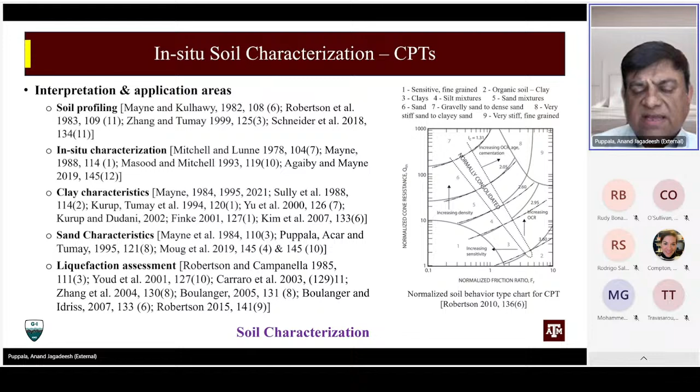There's also a lot of development on liquefaction. Thalia showed a lot of liquefaction assessment work by various methods from Ross Boulanger's and Idriss's group. There are a lot of things that came out on this topic from the US, all published quite well in ASCE JGGE.

I also want to mention interesting calibration chamber work done at Purdue with Rodrigo Salgado, and also Dr. Tumay's group at LSU, who did quite a bit of work. An-Bin Huang also did some work in the early 80s at Clarkson. Again, a lot of this work is mostly done at the calibration level.

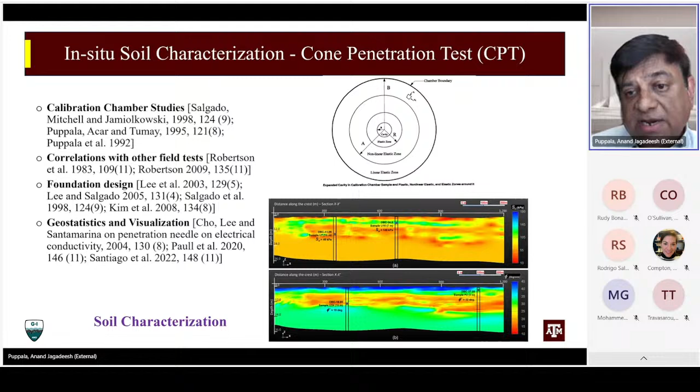Then it went into real practice. Also, a lot of things happening nowadays involve how we can analyze with limited data and then come up with geostatistics and developing visualization. Of late, we're seeing a lot of this work, shown on the right-hand side, from Santiago's paper. Again, this type of work is expanding into site characterization.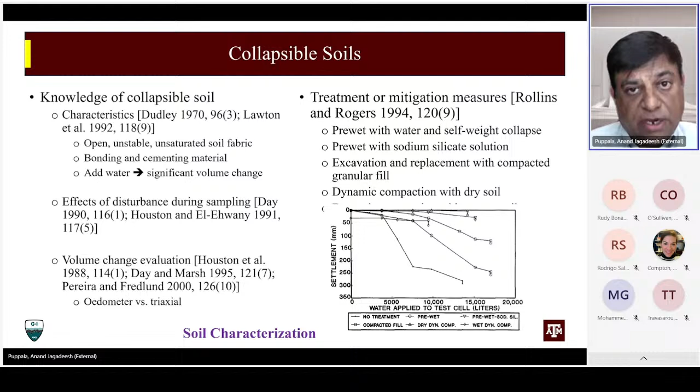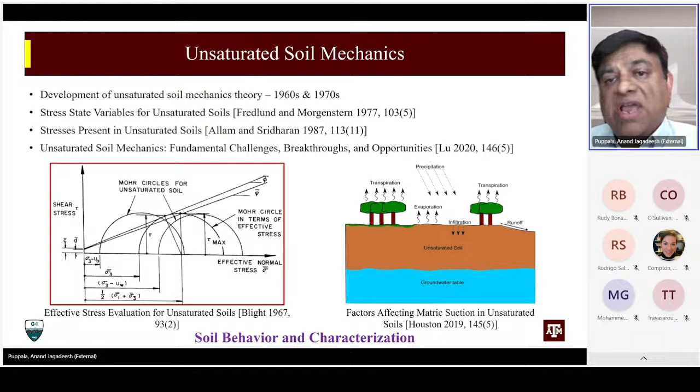Of late, there's a lot of interest in unsaturated soil mechanics, dating since the 60s. Some classic papers I mentioned are from Blight 1967 to Fredlund and Morgenstern 1977, and a lot of papers from several groups. There's also interesting information on soil properties, stresses, and understanding how suctions in soils change with respect to environmental conditions, and this has been of interest.

I mentioned here several papers. Fredlund has done a tremendous amount of work on measurement of volume mass relationships, and more and more work from Ning Lu and Dr. Likos's group working on the suction stress characteristic curve. Also, Zornberg and McCartney are working on understanding permeability changes in unsaturated soil.

So I listed several papers at the bottom related to suction and soil water characteristic curve, and also linking them with the shear strength and moduli in unsaturated conditions, and to some permeability properties on the right-hand side.

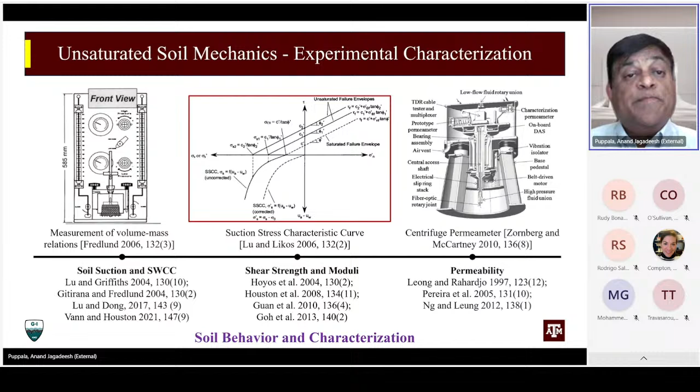Another area where I've been working is understanding expansive soil. I should mention several past works done by Houston, and also the work from Fredlund, understanding unsaturated soil properties, and then connecting them with stabilizing deep mixing columns, and how we understand stabilized soils behave, or what changes transpire in SWCC.

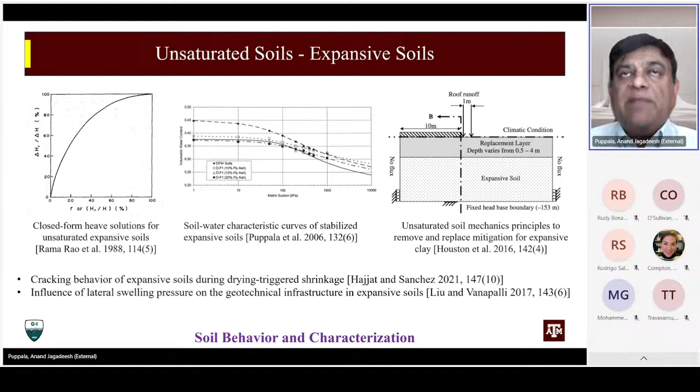This is helping quite a bit in converting into practice also. I see a lot of interesting work going from theory to practice. There's a paper, the 41st Terzaghi lecture by Fredlund, that talked about some practice-related information, and a lot of papers from Bill Likos on thermal conductivity, to seepage analysis by Tim Stark and his group.

Other folks are working on plate load testing on unsaturated material. So there is a lot of interest going from unsaturated soil mechanics at the lab level to field implementation, or understanding field issues a little bit better. This has been happening a lot in unsaturated soil mechanics.

One last slide before I close: this is an area where Jim Mitchell, in his 20th Terzaghi lecture, mentioned this particular problem of sulfate soil heaving. He mentioned some parking lots in the Kansas area, and some areas in Las Vegas. A lot of work came after that.

Some of the first few papers published in JGGE looked at the sulfate attack. After Jim's talk, Dale Hunter, a geologist from the Nevada region, talked about this issue.

You see the picture on the left side - that is one of the highways in Nevada that was only a few months old, and it heaved very badly. So it led to a lot of understanding of soil behavior, soil chemistry, what caused this heaving, and then how do we reduce it?

There's a lot of interesting work going on, and Dr. Rollings from the Army Corps of Engineers worked on where the problems started, actually on a treated soil basis. We've been working a lot on sulfate soil. Because of all this work happening in the last, I'd say, 10 plus years, nowadays sulfate screening became part of routine practice in in situ characterization.

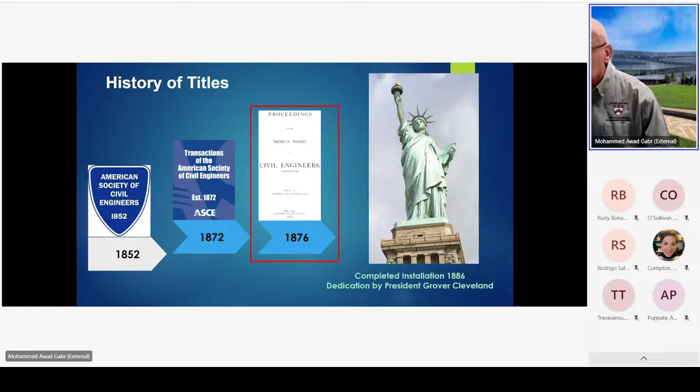While the transactions housed in-depth technical papers, it became apparent that there was a need to capture and quickly disseminate current activities, trends, news, and discussions specifically targeted toward practicing engineers. So four years after the publication of the first volume of the transactions, the proceedings of the American Society of Civil Engineers were established, and volume 1 was published. Ten issues of the proceedings were published per year, and I read that typically in the months of July and August the proceedings were not published.

As the technical field of civil engineering subdisciplines matured, the need for a dedicated platform for each subdiscipline became evident. In 1906, the Soil Mechanics Committee of the ASCE was formed, along with other civil engineering subdiscipline committees, marking a significant step toward specialization. By 1924, the committee published its first standalone report highlighting the growing importance of soil mechanics in civil structures.

In 1936, the first international congress, or conference, on soil mechanics and foundation engineering was held at Harvard University, where Terzaghi was the chair and Casagrande was involved in the organization making this conference happen. In the same year, the Soil Mechanics and Foundation Division was authorized by the ASCE, with Carlton S. Proctor as chair. The division had 13 committees, and the largest committee was the one on earth dams.

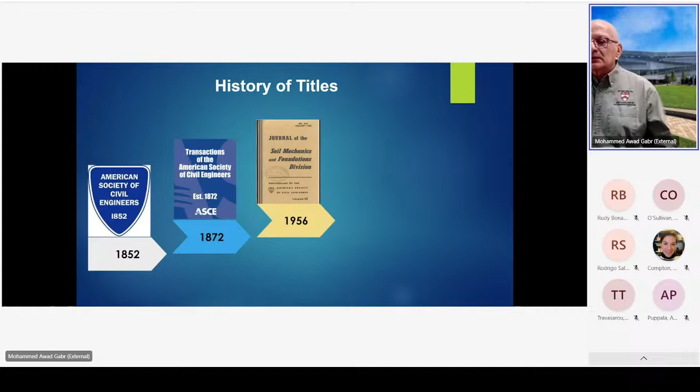The first volume of the journals, volume 82, was published in 1956 - remember the proceedings were established in 1876. As you can notice at the bottom, it still says 'Proceedings of the American Society of Civil Engineers,' hence the volume 82. The last volume of the general proceedings was volume 81, and the first volume of the journal was 82.

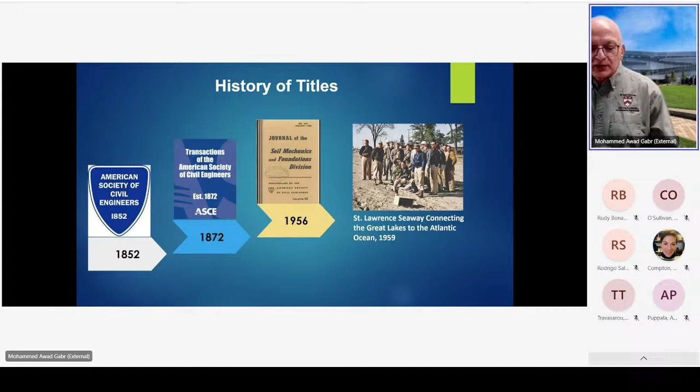The journal started with quarterly issues, four per year, then increased to six issues in 1959, three years later, and became monthly issues in 1971. At that point, T.H. Wu was the chair of the publication committee, and the committee had grown to 19 members.

Three years later, in 1974, the name of the journal was changed to the Journal of Geotechnical Engineering. The best account of the name change was described by Professor Roy Olson in his autobiography, published as part of GSP number 233 honoring Roy Olson. It was argued that the title Soil Mechanics and Foundation Engineering did not encompass the field's breadth, things like earthquake engineering, soil dynamics, or rock mechanics.

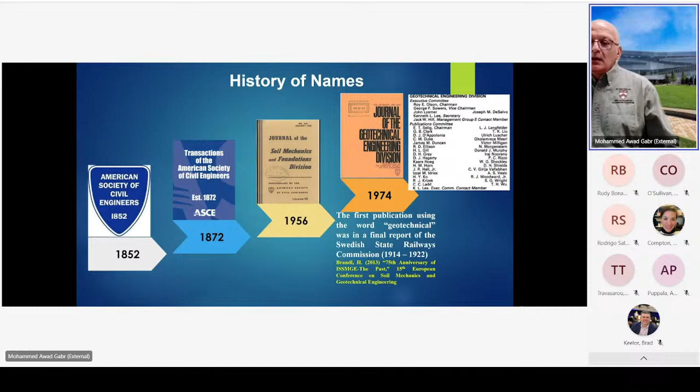Fast forward to the 1980s and early 90s, with CERCLA and the introduction of RCRA and subtitles C and D, there was an emphasis placed on the involvement of geotechnical engineering in solving environmental problems, basically problems related to groundwater remediation and protection of the environment. The business of hazardous and radioactive waste disposal and solid waste disposal grew significantly during that time.

Led by David Daniel, editor of the journal at the time, support was garnered to update the name of the journal to the Journal of Geotechnical and Geoenvironmental Engineering, to reflect the evolving nature of the field. In 1992, the executive committee of the Soil Mechanics and Foundation Division, or Geotechnical Engineering Division, supported the name change.

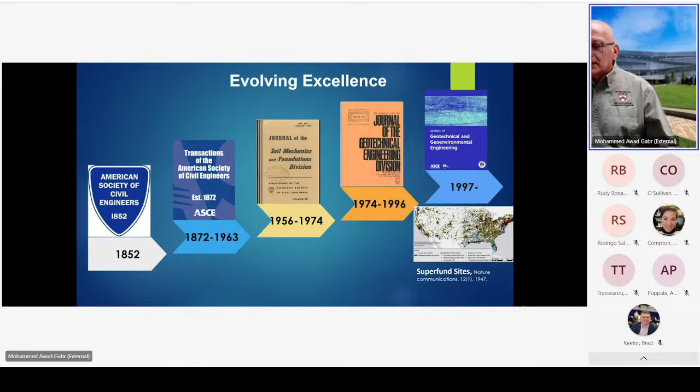Therefore, the journal adopted its name change in January 1997, with that being the first issue to bear the new title. With that first issue, under the new name, there was a new editor-in-chief and four editors, along with a new governance system that remains today, in addition to editorial board members, or associate editors.

In addition to the editor-in-chief and the four editors, the editorial board had more than 50 — I counted 51 — what we called editorial board members, but what are now referred to as associate editors.

So I finally end with the list of the past editors or editors-in-chief of the journal over the past 50 years. As you can see, we have seen the past. It's only befitting to acknowledge the giants who came before us and who established the tradition of novelty, innovation, and excellence, and laid the foundation for success. I'd also like to acknowledge Catherine O'Sullivan as the first female editor of our journal.

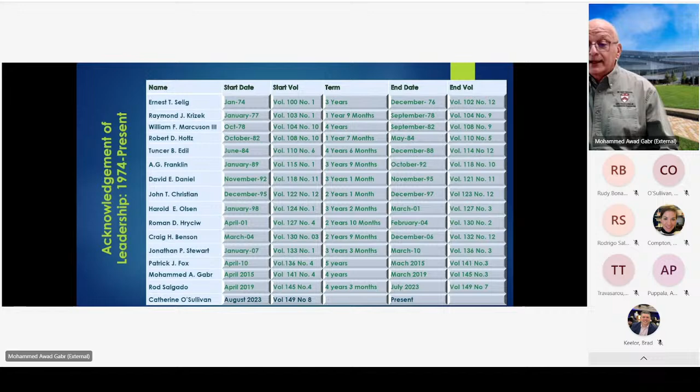Today, the journal remains at the forefront of geotechnical and geoenvironmental engineering, and continues to be a vital resource for researchers, practitioners, and students worldwide. Through your contributions as authors, reviewers, and editors, we continue to push the boundaries of our field forward. I have immense faith that the journal will continue to thrive in the years to come, and I cannot wait to see what the future holds. Thank you.

Thank you so much, Mo, and thanks to all our speakers who've given fantastic contribution to give an idea of what's been achieved by this publication over the 150 volumes. So I'm going to invite some comments from the chat that are coming to me. I can see they are being typed through cyberspace.

Just the first comment is from David Daniel, who said to Rudy, it was a great talk and it was very appropriate to start by acknowledging Mitchell, Hooper, and Campanella in 1965, and thanks for putting that talk together. I'm not sure if there's any more.

I think there's a couple of other questions coming in from the online audience.